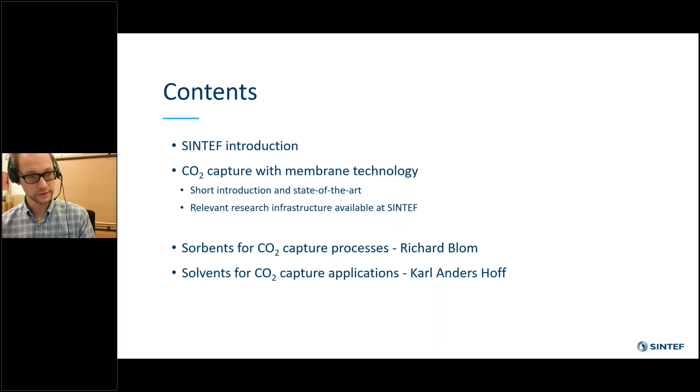So what is SINTEF? SINTEF is Scandinavia's largest independent research organization. We are around 2,000 employees, located both in Trondheim and in Oslo. I am myself located in Oslo. Those 2,000 people come from 72 nationalities, so we are quite an international organization. And we worked, at least in 2019, for 3,500 different customers. Our vision is technology for a better society, and we work in a lot of different areas like oil and gas, health and welfare, ocean space technology, but also renewable energy.

Close to 95% of our income comes from contracts won in open competition, which means only around 5 to 6% of our funding comes from the Norwegian government through basic funding. All the rest is won in competition, for example directly from industry, or from project grants from the Research Council of Norway, or from EU projects.

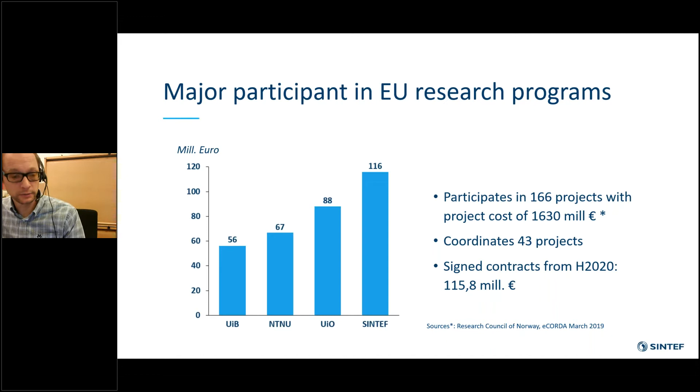This shows that we have around 166 projects at the moment, with close to a project cost of 1.6 billion. We are coordinating 43 projects with quite a high value, at least in Horizon 2020, because we are a major participant in EU research programs.

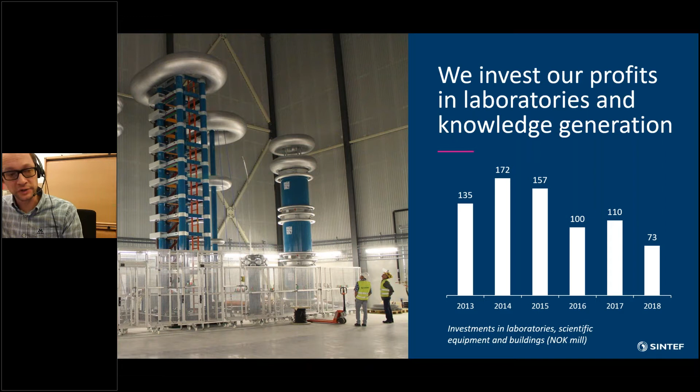But first of all, we are an independent, not-for-profit research institute, so we do not make any more money, and any profit we make is invested again into infrastructure or knowledge. For example, in the last 5 years we have invested a lot in different laboratories, amongst others infrastructure relevant for CCS, which we have made available within ECCSEL, which we will talk about now.

So in a post-combustion or pre-combustion context, they can either be applied on the exhaust gas coming out of a cement plant or a gas turbine, or in combination with the water gas shift in a pre-combustion manner, or to generate oxygen for oxyfuel processes.

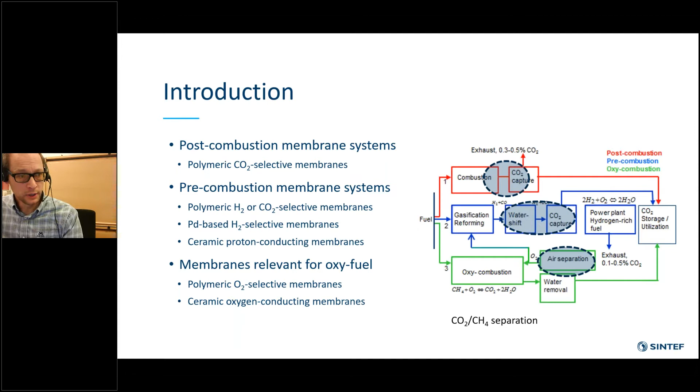So if we start with the post-combustion membrane systems, we work a lot on different processes. We work on the membrane development itself, we work on how to evaluate their performance under real conditions, and we investigate how to integrate them in a techno-economic way in a real process. You have to take into account the membrane properties, the performance, but also the cost to come to a proper process design.

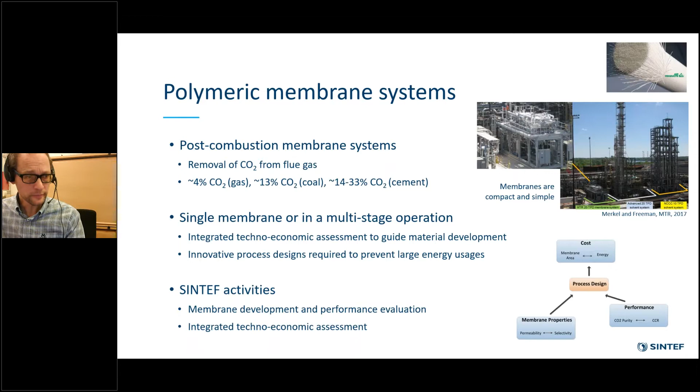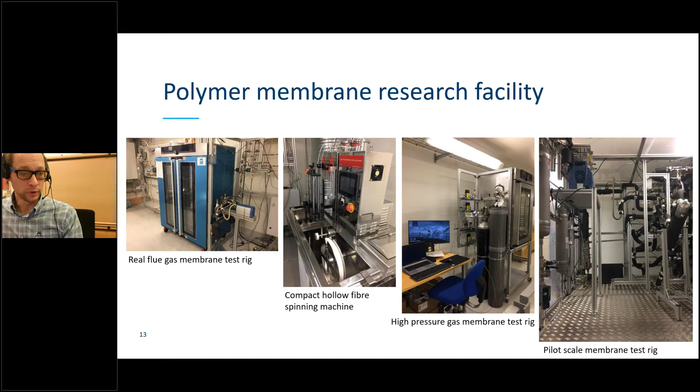All of these are made available within the ECCSEL framework. If we want to test the membranes under more real gases, including gaseous contaminants typically present in a flue gas or in natural gas, we have also a special gas laboratory where we can test the membranes in the presence of, for example, H2S, SO2, or ammonia. Because of those gases, there is a large focus on HSE.

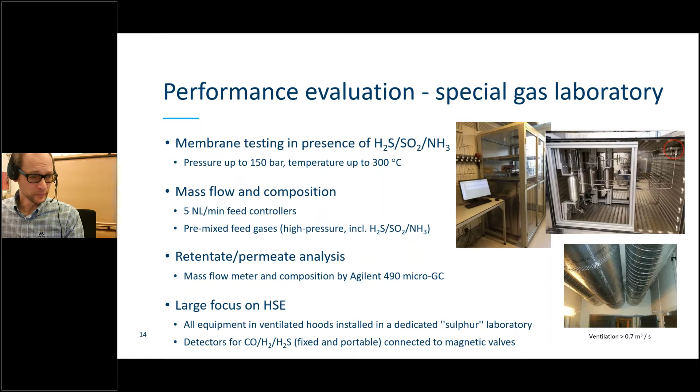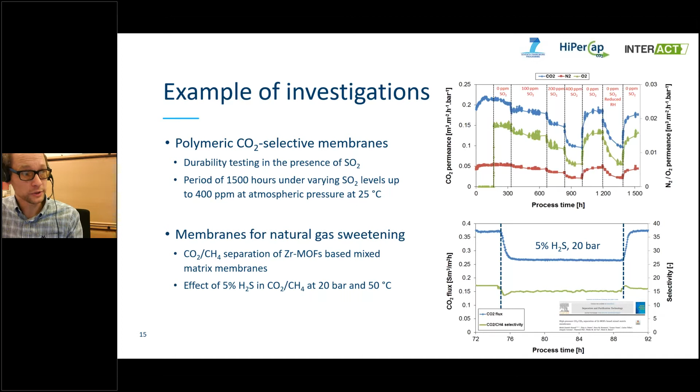So if we continue with the pre-combustion membrane systems, at SINTEF we have worked a lot on ceramic membranes, either relevant for air separation, so oxygen selective, or membranes selective to hydrogen, proton-conducting membranes. We have worked a lot there together with a company, making those membranes and testing them in different processes, for example hydrogen production from natural gas with CCS, but also in a process where they make aromatics and hydrogen from natural gas.

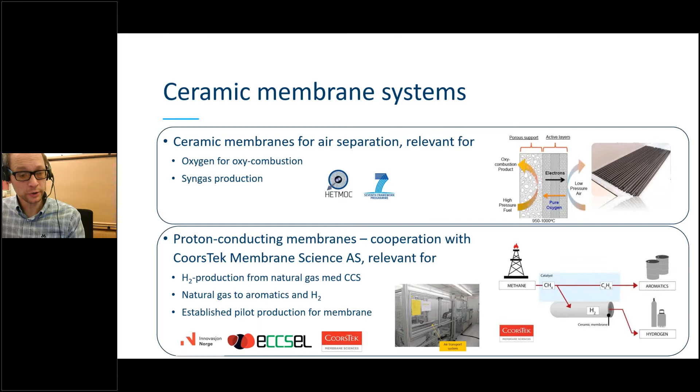In those projects, we have established pilot production lines, but also substantial test facilities. In terms of ceramic oxygen conducting membranes, they are tested a lot and have reached a high TRL scale in terms of oxygen production. But for pure oxygen production, these membranes are maybe not the most optimal. Maybe they're more optimal for syngas production.

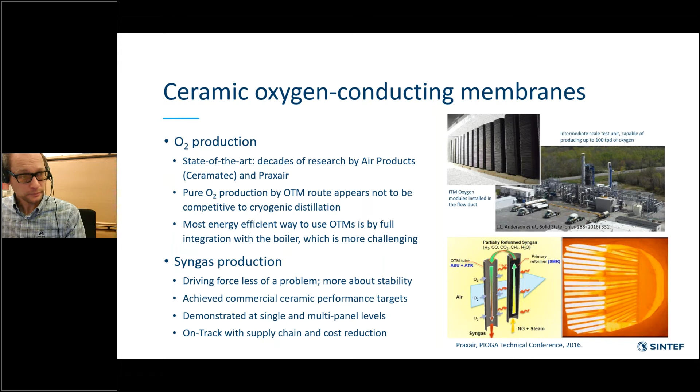In terms of hydrogen selective membranes, we have worked a lot with a company called CoorsTek Membrane Sciences that developed a process for electrochemical hydrogen separation and compression based on electrochemical membrane reactors, where the operation of the steam methane reforming is balanced with the heat evolved from the operation of the cell itself. This is a membrane integrated SMR reaction where you simultaneously can get a high conversion and yield of CO2 and can produce hydrogen at high purity and high pressure.

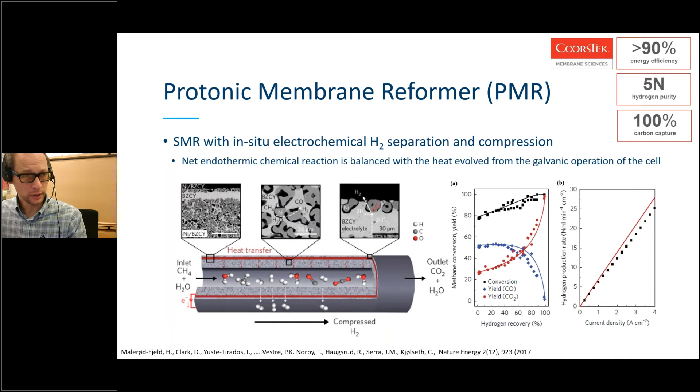As I mentioned, we have unique infrastructure for manufacturing ceramic membranes. They are typically made by extrusion followed by coating, and all of these are done within the clean room facilities we have here. These membranes can also be tested in the presence of more dangerous gases in the special gas laboratory that I mentioned.

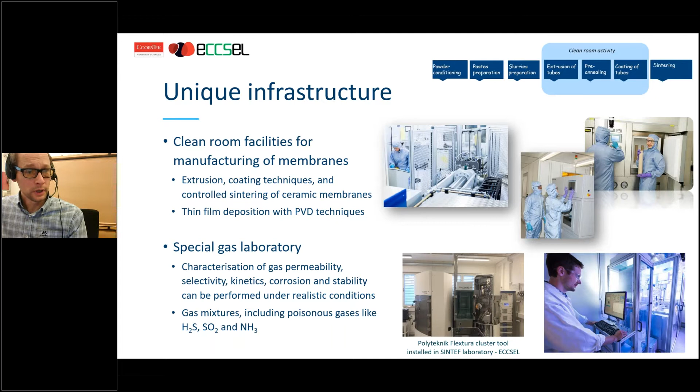In terms of metallic membranes, we have worked a lot on palladium-based membranes that are relevant for high temperature hydrogen separation, typically operating at temperatures between 300 and 550 degrees C.

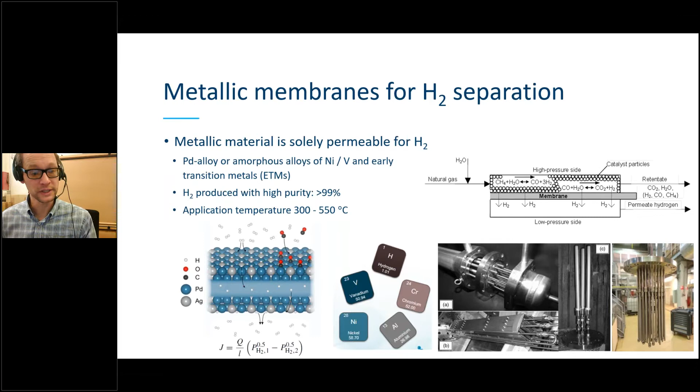The scientific challenges and activities we have had are mostly related to lifetime issues, the stability of those membranes against contaminants, and the long-term operation. What is really happening if you operate these membranes over a period of 1 or 2 years? What is happening with the microstructure? We have worked on module design and also on upscaling the membrane technology itself.

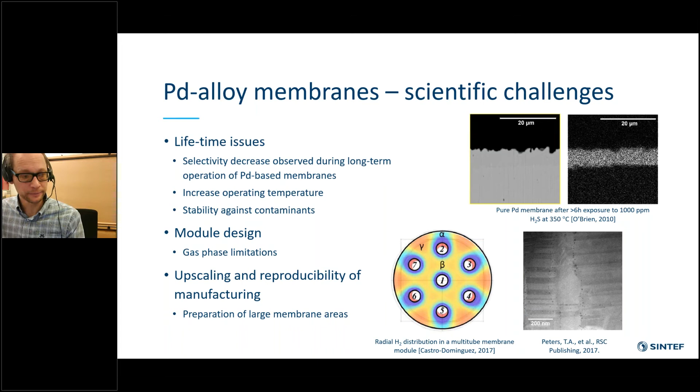For these, we also have good test facilities, and lately these membranes have been tested at the methanol synthesis plant here in Norway.

So in conclusion, very rapidly, we have good facilities and large activities on membrane processes in gas separation, production and use. We have all the equipment available to test membranes at realistic operating conditions, and questions or inquiries at a later stage you can direct to me.

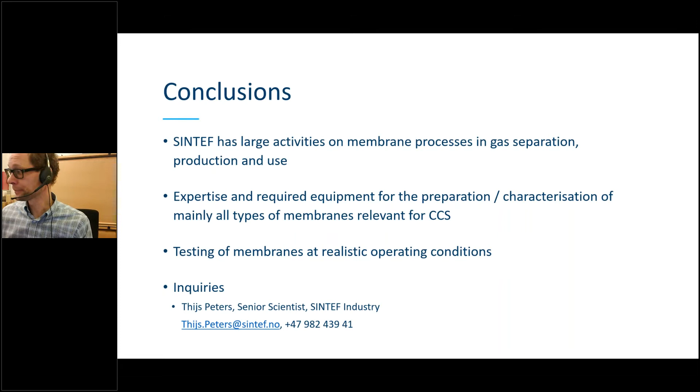Here are a lot of acknowledgements of different projects and financing institutes, and then it's the next presentation. Thank you.

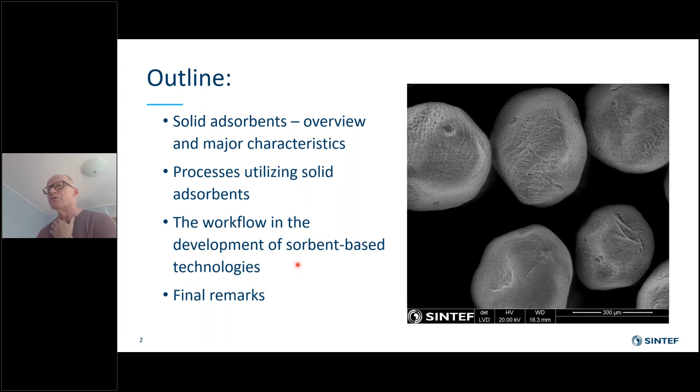I'll talk a little bit about solid sorbents used for CO2 capture, in a similar manner as Thijs. First, I will tell you about the different sorbents, the different kinds of materials used for CO2 capture. Then I'll go into the process, as there are a number of different processes that can be used to regenerate the sorbent, which is the most critical part. I'll also give some info about what I see as a workflow in the development of sorbent-based technologies. This is a place where you will need infrastructure to get through. And at the end, I'll give some final remarks.

This is a layered mineral, so it's not changing the properties so much during cycling, in contrast to calcium oxide, for instance, where you really change the material significantly from oxide to carbonate and back and forth. So it will give a lot of internal stress in the material.

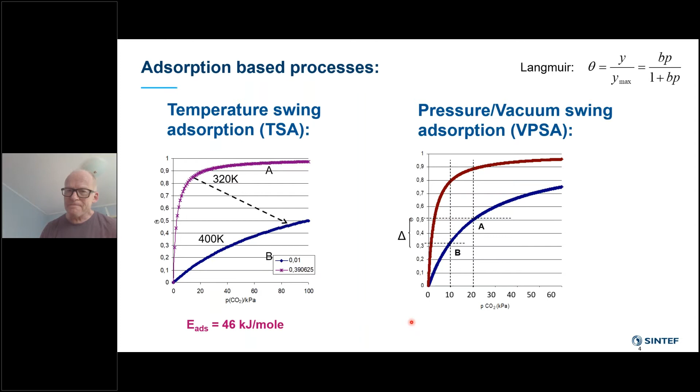So the shape of the isotherm is the first thing you look at when choosing an adsorbent for a process. But you also need to know what kind of gas you have to capture the CO2 from, which is very important—the boundary conditions for your process. It all goes hand in hand; there's a very close connection between the adsorbent and the optimal process to use.

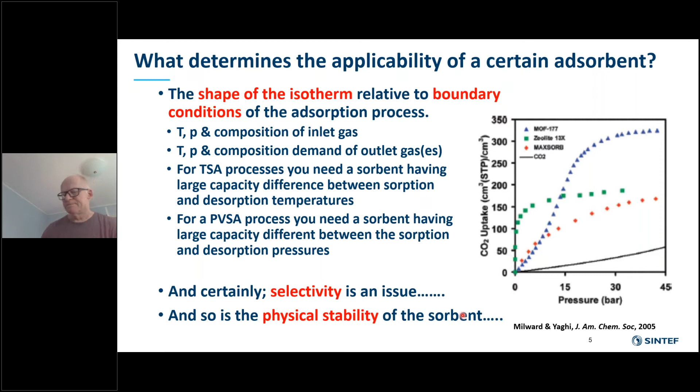You might also check water adsorption on this powder. But quite early you need to think about shaping, because in the real process you need shaped bodies—you don't want the material to follow the gas flow out of the reactor, you want it to stay and do its job. So you need to figure out what kind of shape it should have for the process.

After shaping, you have to measure it again—the isotherms and so on—to check that the material is still okay, since shaping can involve temperature and pressure that might affect it. Extrusion, for example, can easily destroy a soft material. So you need all kinds of measurements, both equilibrium measurements—all the isotherms you need—and kinetic measurements, like how fast gas flows through your pellet.

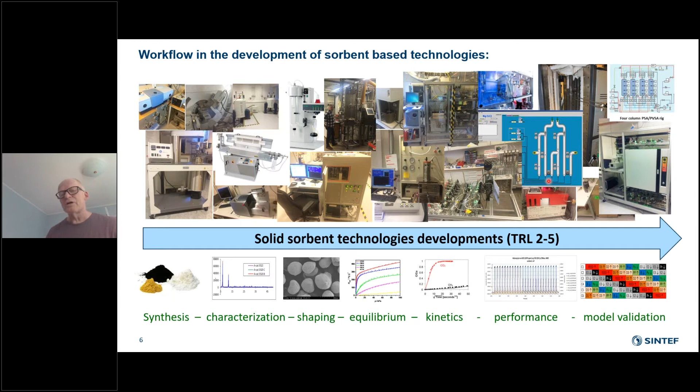I'll say a little about shaping, because this is something people seem to forget. There are so many papers where everything is done on a fluffy powder straight from the lab, with no real knowledge of how it can be used in real life. So shaping is extremely important, and there are many ways to do it.

Even for soft materials there are quite good shaping methods out there, and we've worked on a number of these. More recently we started working on 3D printing of adsorbents as well, which is promising if you really want to go to high gas velocities and low cycle times in the process.

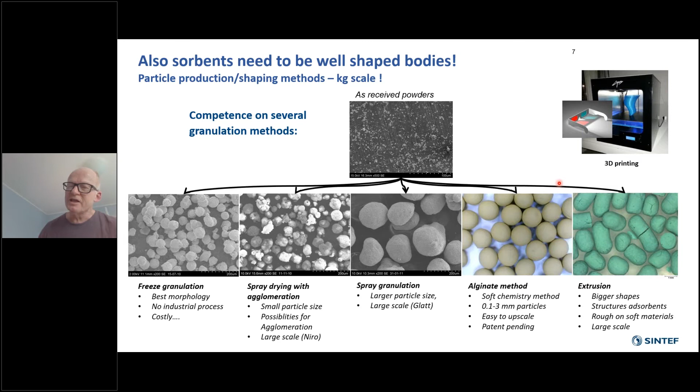We have a 4-column PVSA reactor that's used for testing and validating modeling results, which is working quite nicely. This is kind of small scale—we need something like 60-70 grams of shaped adsorbent in each column, about 1 inch in diameter.

It can go to very high pressures, like 70 atmospheres, which is typically the pressure used for natural gas sweetening as well. So it's not only for CCS, but also sweetening experiments—very versatile, I'd say.

The newcomer in the testing lab is a moving bed TSA process that we're just finalizing now and testing out. It's a fairly unproven technology—there are very few of these reactors in the world.

First we have an adsorption section up top with a feeder. You feed the sorbent through a screw at a constant rate, adsorb the CO2, then move it into the desorption section, which is heated up to a certain temperature to release the CO2. It goes out, then you cool it down before transporting it back up to the silo for a new cycle.

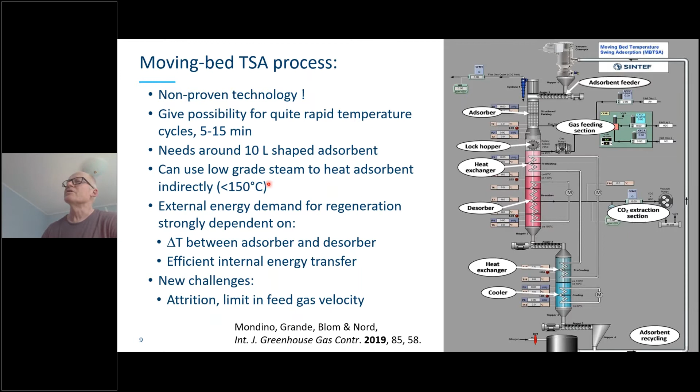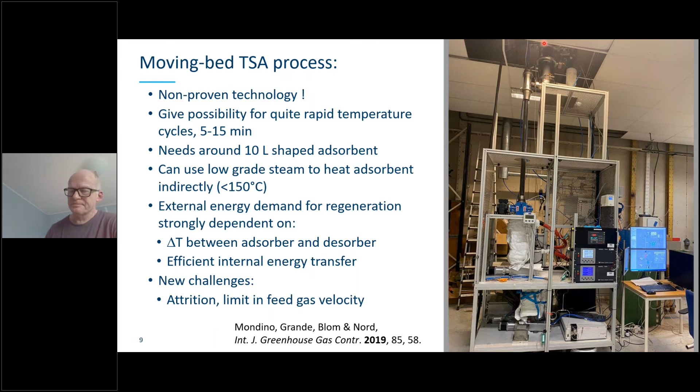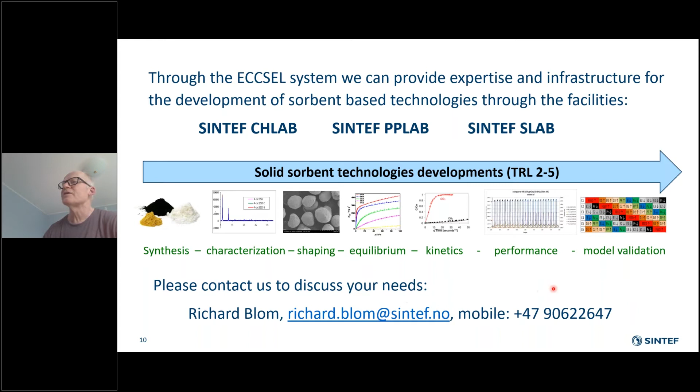So I've given you a taste of what we have and what is important when you develop solid sorbent-based technologies. I think each adsorbent needs to be treated in its own way in this world. So if you are working on this and need some expertise, or need to have done some experiments, please take contact, and then we can discuss what you need, and we can probably help you, and you might also do some in your own lab. So here are my contact details, and I wanted to thank you for your attention. That's it.

Thank you very much, Richard. Really interesting presentation, very high level technology, and so thank you.

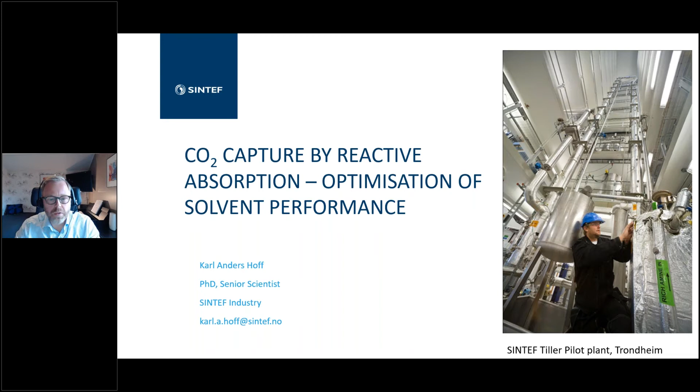Reactive absorption is the capture technology being used in the very first full-scale capture projects for CO2 internationally, at Boundary Dam, at Petra Nova outside of Houston in the US, and also at Norcem Brevik in Norway as part of the Longship, the Norwegian Longship project. In Norcem Brevik, they will use solvent-based technology developed by Aker in cooperation with SINTEF.

Another important feature is that this process doesn't just separate and capture the CO2, but it also compresses the CO2 thermally. Without using mechanical work, the CO2 leaves this process at a pressure of at least 1.5 bar, even up to 10 bar, depending on solvent and process operating conditions. This is also very important, since the liquid CO2 will ultimately be the end product for most of these capture processes. It's also highly scalable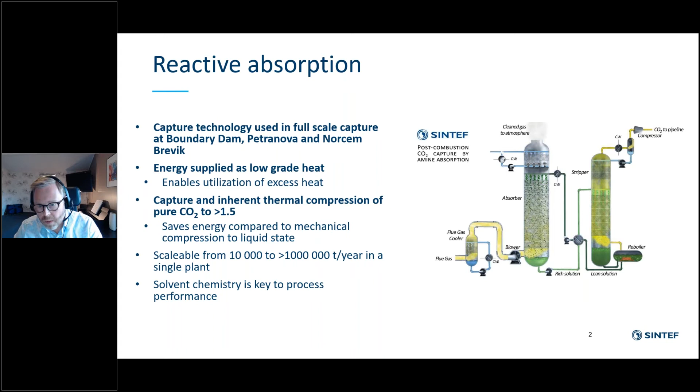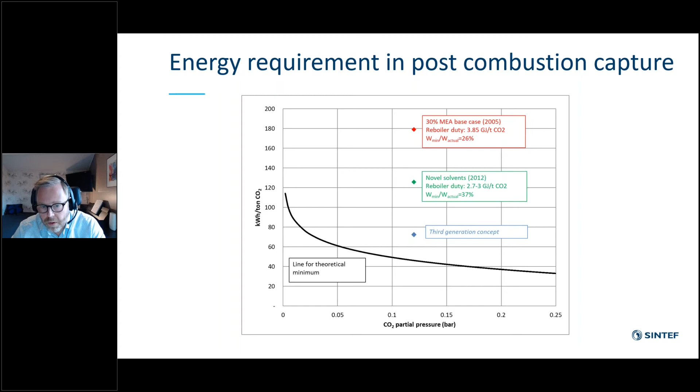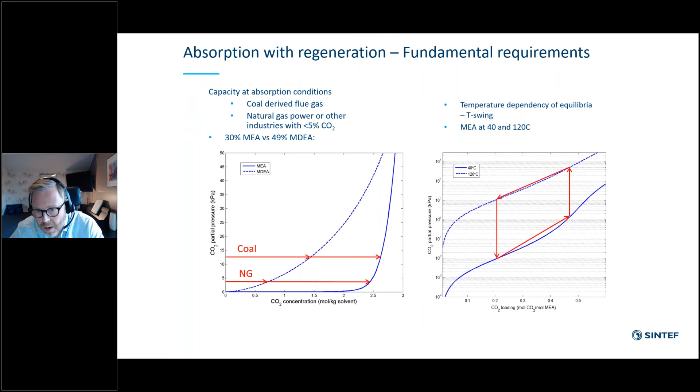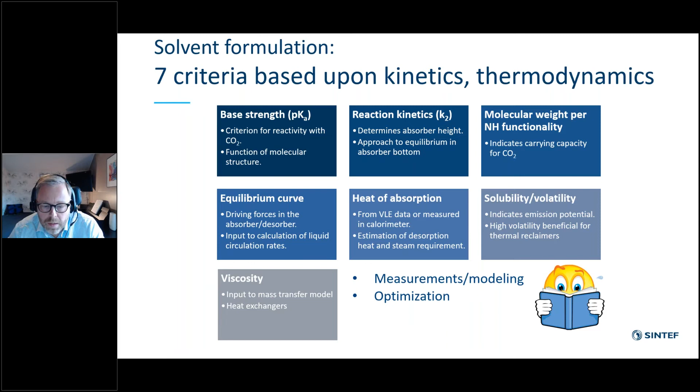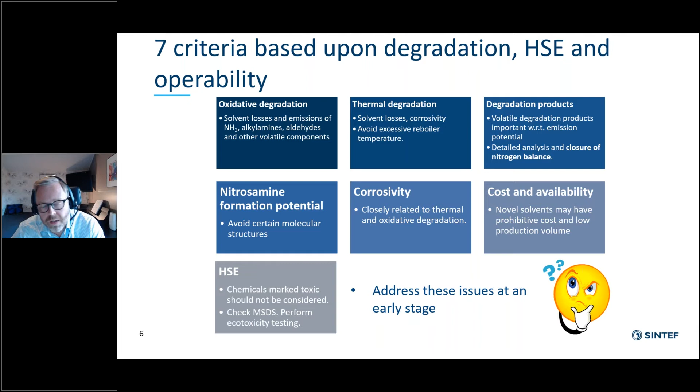In addition to these 7 criteria, which is based upon things that you can measure in the lab, model, and deduce and optimize, you also need to relate to other properties essential in operation: degradation, performance, degradation products, corrosivity, cost and availability, and HSE. So these are altogether 14 criteria that a functional solvent needs to fulfill.

A workflow for development of solvent systems for this process should start by evaluating a large number of solvent candidates to build a solvent formulation, then performing a screening test to investigate the fundamental performance in terms of absorption capacity and temperature dependency. From our experience, it's very important to do degradation testing at an early stage, preferably before you go to the detailed measurement of VLE, kinetics, and viscosity, which are more labor-intensive and costly measurements.

After that, you go further to developing a process simulation, performance tests, and preparing for pilot testing, where you learn more about the performance. Along the way, you do more VLE, more kinetics, viscosity as needed, and finally you will be able to do a detailed modeling and prepare for a test at larger scale.

So in the slide to the right, we see the illustration of working from the molecular level via degradation testing, basic VLE measurements, and finally the pilot testing. Here we see a picture of our Tiller lab facility here in Trondheim, which can study these solvents in a full height operation, capturing 90% of the CO2.

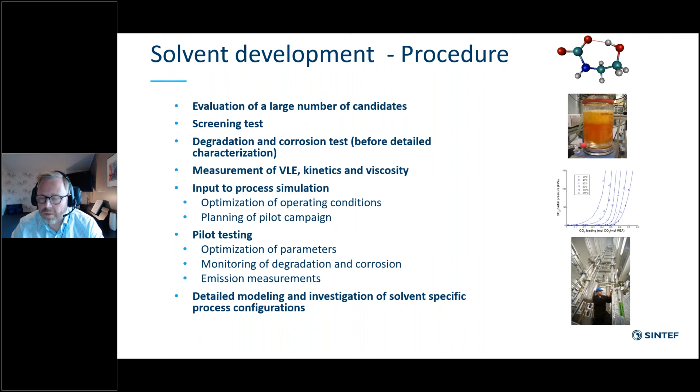Back to the screening stage, what we are looking for in the functional solvent is a combination of a high cycle capacity and a high absorption rate. So we want to be in the upper right in this picture.

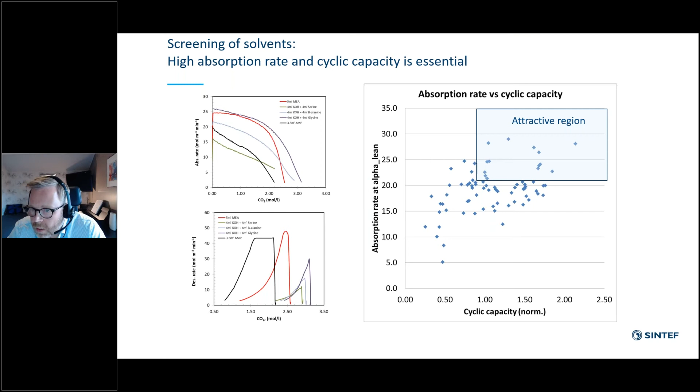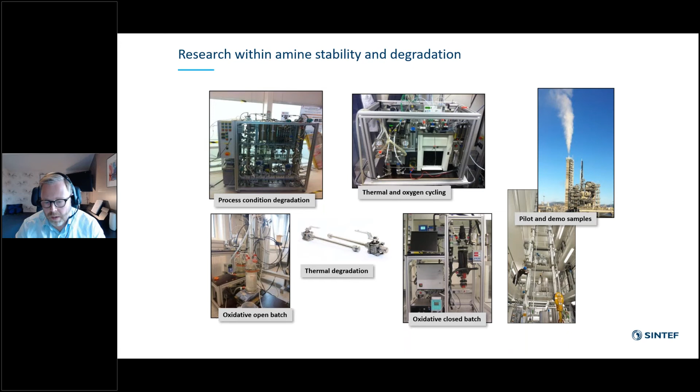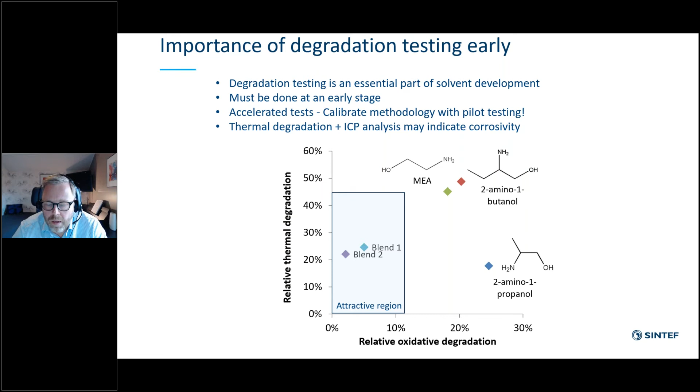This performance is also quite essential to investigate. So we are looking for obviously low tendency to degrade oxidatively and thermally, looking for systems in the lower left in this diagram. As I said, this test should be done at an early stage in solvent development.

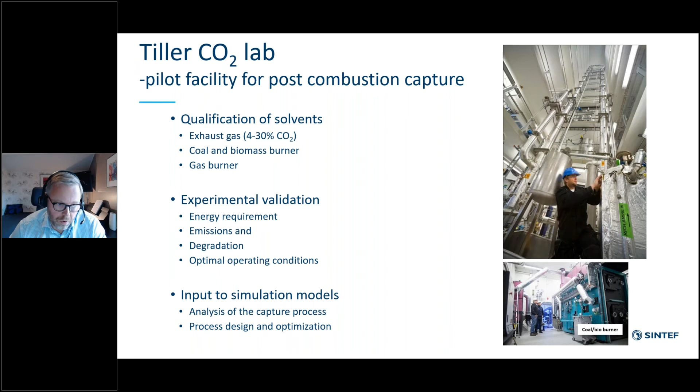Finally, back to the pilot testing, where you get the full performance and a lot of information in terms of energy requirement, emissions performance, degradation performance, and you also get a lot of results that you can use in a simulation model to further optimize the process performance.

And for that, we use our own simulator, CO2Sim, which is a rigorous advanced process simulator developed by SINTEF, where we can do process performance evaluation and optimizations with new solvents. This tool holds rigorous thermodynamics and mass transfer models, and it's a rate-based model for all units.

For example, one thing we can see from working with CO2Sim, from the thermodynamic model, is how the full energy requirement, the combined energy requirement as the specific reboiler duty, is actually a compound of 3 different terms: the heat of desorption, sensible heat, and the stripping steam energy requirement. We can see that the desorption energy, the green, is the biggest contribution to the energy requirements, and this is obviously due to the heat of reaction, which is the dominating term in the desorption energy requirement.

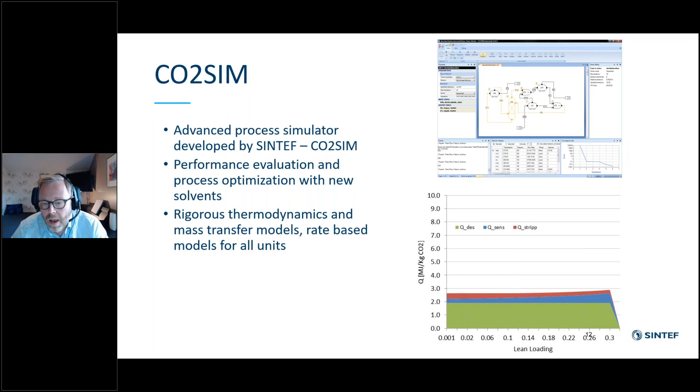So that was a quite fast walkthrough of the main elements of solvent development. I just wanted to summarize this briefly: the number of criteria that must be addressed to qualify a single solvent for industrial application is very large.

There are many solvents that can show potential energy benefit, but you need to evaluate degradation performance. You need also to document low risk of emissions, and you need to close the nitrogen balance from degradation testing and working on the degradation chemistry.

It's also important to note that the energy requirement, an important feature of this technology, is not a solvent property as such, but is based on the process configuration, process performance, and operating conditions. So that has to be optimized and analyzed deeply.

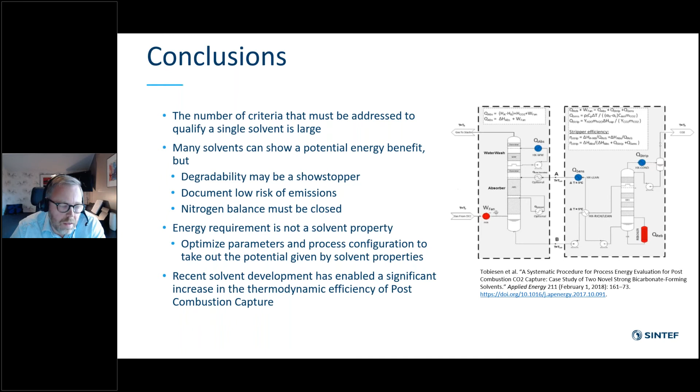Still, the recent work on solvent development has really enabled a significant increase in the thermodynamic efficiency of post-combustion capture. And as I said, the technology is being put into action in industrial full-scale projects as we speak.

So that was my final conclusion. Thank you for listening.